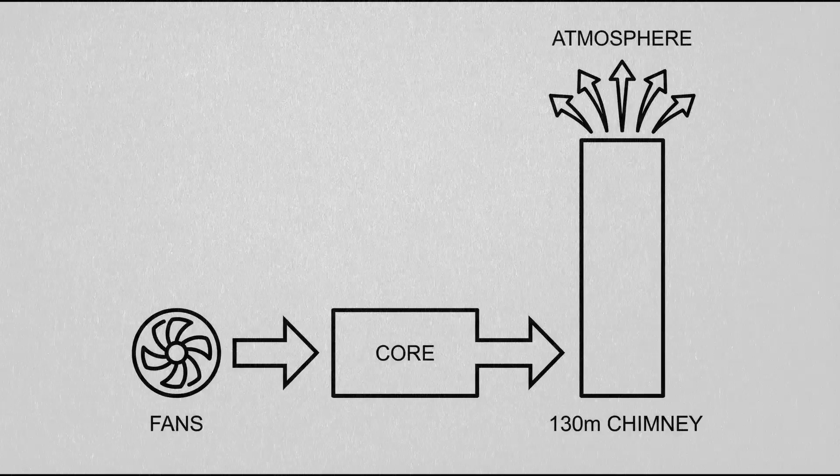No containment vessel and no sealed cooling loop. Just air in and air out. It was cheap, it was simple, and for 7 years it worked. By 1957, the reactor had been running for 40,000 megawatt hours. And the graphite had a problem.

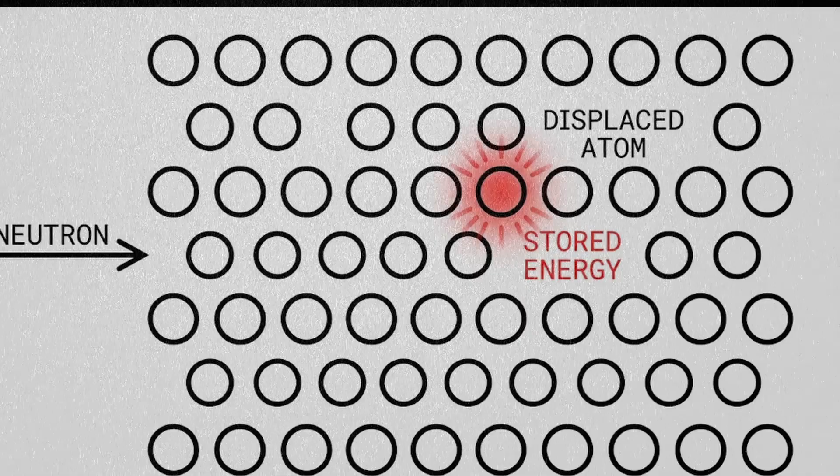When neutrons strike carbon atoms in a graphite lattice, they knock them out of position, creating microscopic defects that store energy. Physicists called this Wigner energy, after the Nobel laureate who predicted it. Left unchecked, it accumulates, up to 2,000 joules per gram. Enough to heat the graphite by several hundred degrees in an instant, without any external source of fire. 2,000 tons of it, all storing that energy.

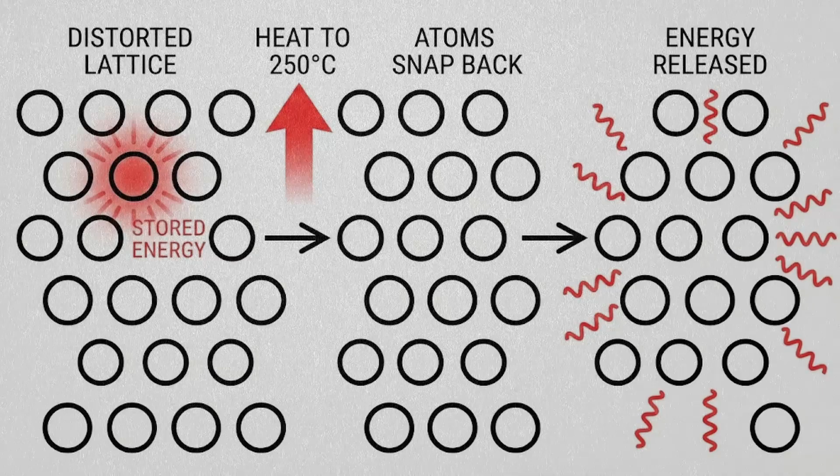The only way to release it safely was to heat the graphite to around 250 degrees Celsius, allowing the displaced atoms to snap back into position. They called this procedure annealing. On October 7, 1957, the operators shut down Windscale Pile Number 1 for its 9th annealing cycle. It would be its last.

The fuel inside Windscale's core was natural uranium metal, 72,000 cartridges of it, threaded through the graphite. And uranium has a property that most people never consider. It burns. Expose metallic uranium to oxygen at temperatures above 250 degrees Celsius, and it oxidizes. Violently, exothermically, and once started, almost impossible to stop.

250 degrees Celsius. That was also the target temperature for the annealing procedure, the very process designed to keep the reactor safe. The temperature needed to release Wigner energy safely? 250 degrees. The temperature at which the fuel catches fire? 250 degrees. The margin between safety and catastrophe was 0. And the uranium was not alone.

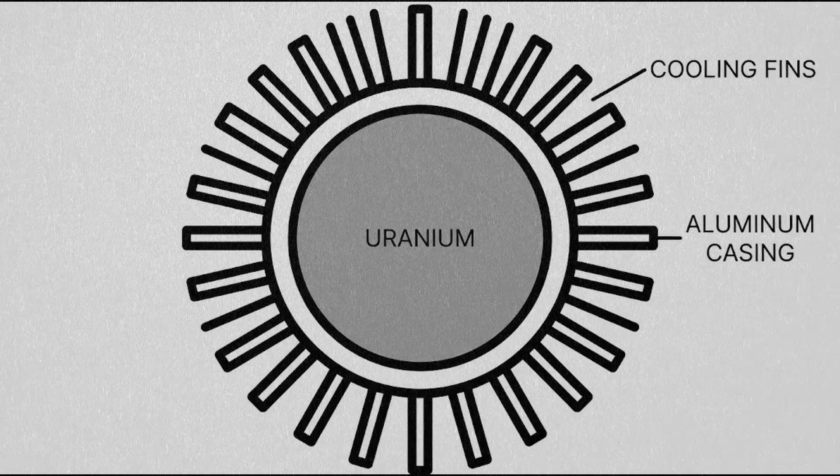Each fuel cartridge was sealed inside an aluminum casing with cooling fins designed to dissipate heat into the passing air. But in 1955, engineers had shaved 1.6 millimeters off each fin tip, a modification to reduce neutron absorption and increase plutonium production. The cooling efficiency dropped. Local hotspots became harder to prevent.

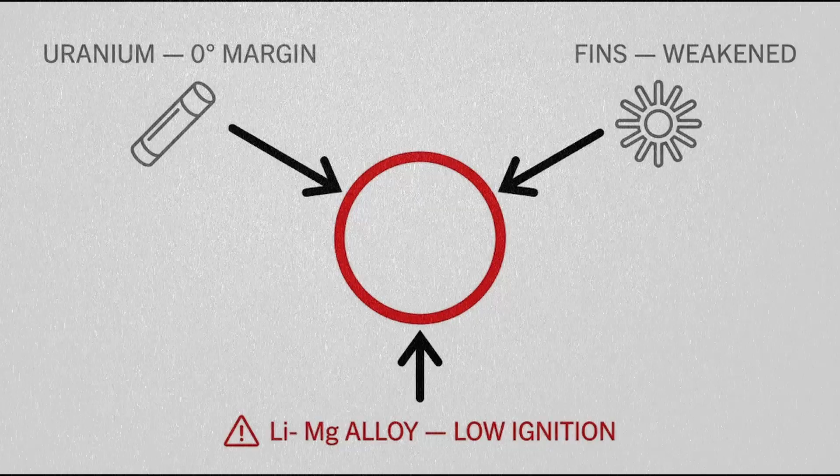And there was one more element in the core that was never part of the original design. Britain's hydrogen bomb program required tritium. To produce it, lithium-magnesium alloy cartridges had been loaded into the reactor, a material that ignites at temperatures lower than uranium. Natural uranium with a 0-degree safety margin. Cooling fins deliberately weakened. A foreign alloy that burns at lower temperatures than the fuel itself. The reactor was not just carrying fuel, it was carrying an accelerant.

So the fuel was waiting. But fuel doesn't ignite itself. For that, you need a trigger, and a system that can't see it coming. The operators had one job during annealing: watch the temperature. But the instruments were watching the wrong place.

The thermocouples, the reactor's only temperature sensors, were positioned at the front face and lower center of the core. These locations reflected where temperatures peaked during normal operation. But annealing was not normal operation. During Wigner energy release, heat builds unevenly, in isolated pockets scattered across thousands of fuel channels. The sensors could not see them.

On October 8th, at 11:25 in the morning, 34 hours after shutdown, one thermocouple showed something unusual. Channel 20/53 was climbing at 10 degrees Celsius per minute. The safe rate was less than 5. But on the control panel, the surrounding channels showed temperatures falling, as expected.

One channel rising at twice the safe rate. Every other reading on the panel declining. The operators concluded that the Wigner release had stalled. At 5 o'clock that evening, they initiated a second nuclear heating. They pushed more energy into a core that was already on fire in a place they couldn't see.

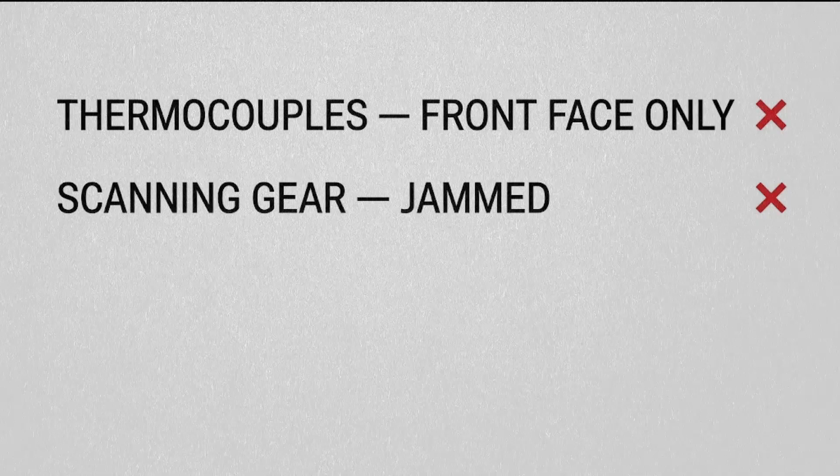And there was no one to stop them. The thermocouples showed a safe picture. The scanning gear, designed to detect fuel damage, had jammed from thermal distortion. The safety review had been conducted by the same organization that operated the reactor. No independent regulator existed. Under the 1954 Atomic Energy Authority Act, the operators, the designers, and the safety inspectors all worked for the same institution.

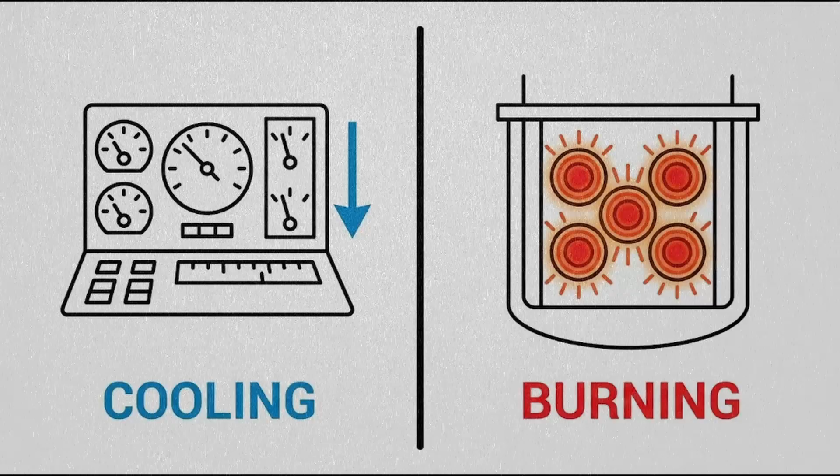Sovereign immunity shielded the facility from local fire codes, public health regulations, and external oversight. The instruments said the reactor was cooling. The reactor was burning. And no one outside the fence knew. By the morning of October 10th, the chimney's radiation monitor spiked, 6 curies above normal. Something inside the reactor was releasing radioactive material into the exhaust.

At 4:30 that afternoon, 87 hours after shutdown, an operator climbed to the charge face and looked directly into a fuel channel. The uranium was glowing cherry red. 150 channels were on fire, with an estimated 11 tons of uranium ablaze. The response was instinctive: open the dampers, increase the airflow, cool it down.

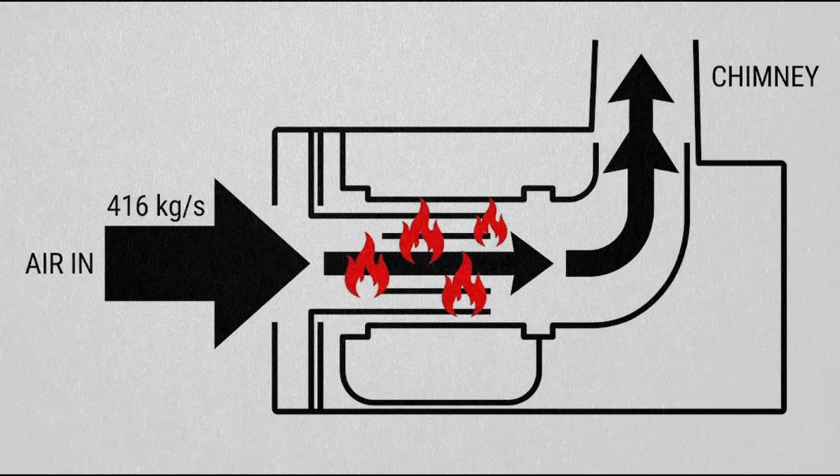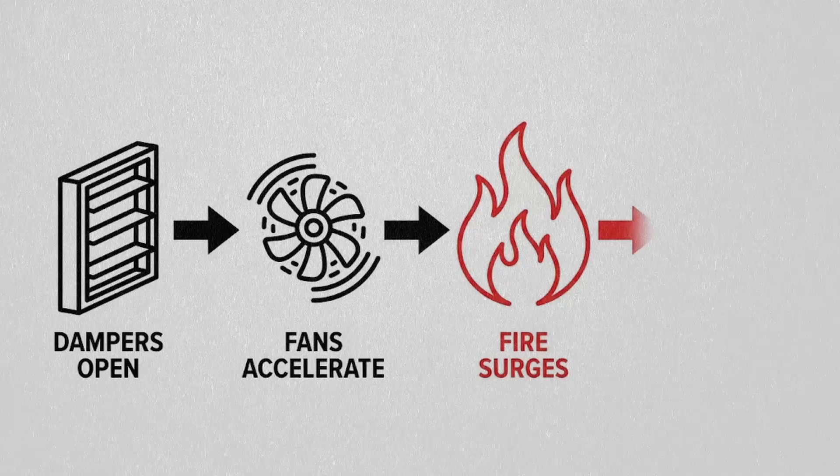416 kilograms of air per second flooded into the burning core. Air contains oxygen, and oxygen feeds combustion. The cooling system had become a bellows. The dampers opened, the fans accelerated, the fire surged. The chimney radiation readings climbed beyond anything the instruments could measure.

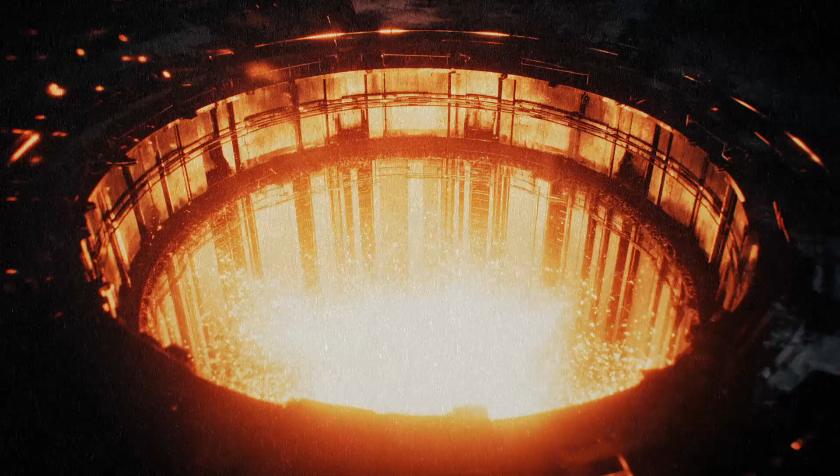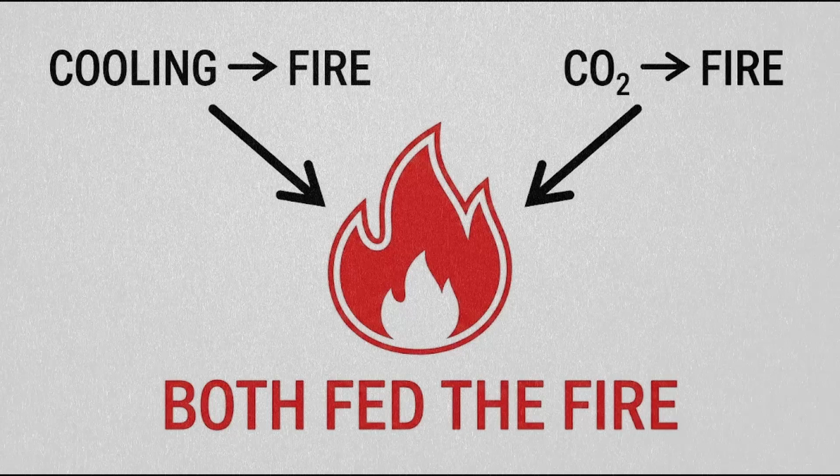They tried carbon dioxide, pumping it into the core to smother the flames. But at 1300 degrees Celsius, CO2 dissociates, splitting into carbon monoxide and free oxygen. The fire extinguisher had become another source of oxygen. The cooling system fed the fire. The fire extinguisher fed the fire. There was only one option left: water.

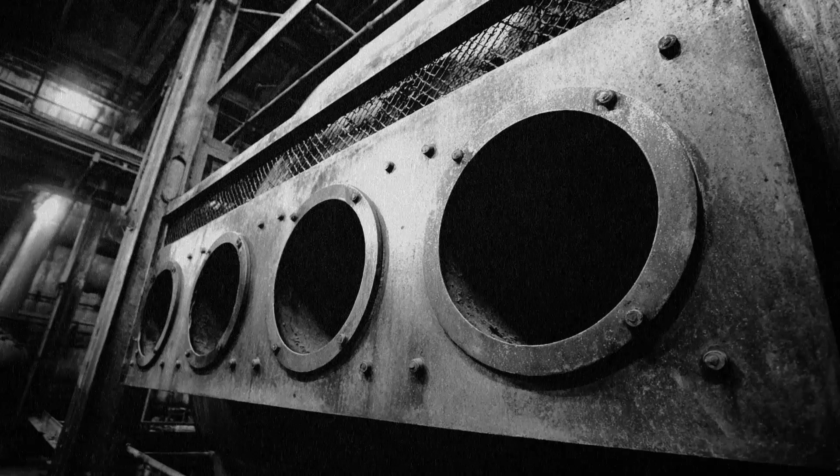But water and uranium at 1300 degrees produce hydrogen gas. And hydrogen, in the presence of oxygen and heat, explodes. To use water, they first had to remove the oxygen entirely. At 10 minutes past 10 on the morning of October 11th, the shutdown fans were sealed. Airflow dropped to 0 kilograms per second.

And then they opened the water. 1,000 gallons per minute, poured onto a reactor core at 1300 degrees with no certainty that it wouldn't detonate. It didn't. The fire began to die. It was 5 o'clock in the evening on October 11, 1957.

Channel 20/53, deep inside the core of Windscale Pile No. 1. The fuel, natural uranium metal with a self-ignition temperature of 250 degrees, cooled by fins that had been deliberately weakened, surrounded by lithium-magnesium alloy that burns at even lower temperatures.

The trap. Thermocouples positioned for normal operation, blind to the hot spots of annealing, feeding operators a picture of safety while the core burned in their blind spot. No independent regulator, no external check.

The path. An open-cycle air-cooled reactor where the cooling system draws oxygen directly across the fuel and exhausts it through a chimney into the open sky. A system that, in a fire, becomes a 416 kilogram per second bellows. In that configuration, the physics had only one outcome. The operators saw a temperature drop on their instruments. They added more heat. The reactor reached 1,300 degrees and the uranium melted.

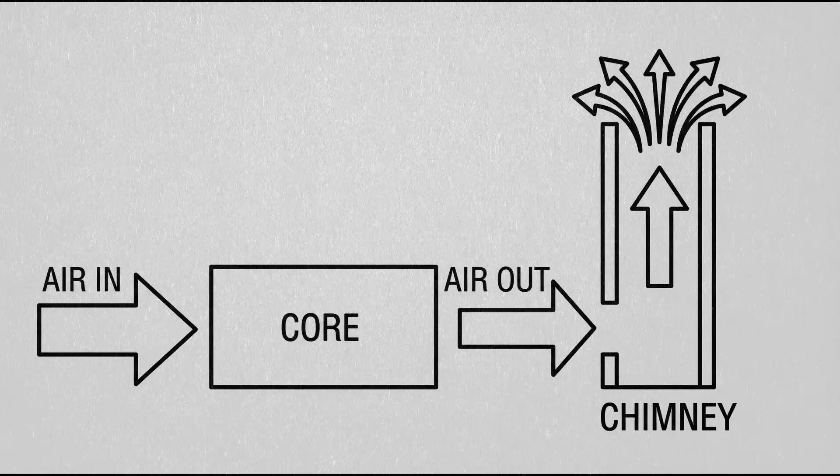The chimney carried 20,000 curies of iodine-131 across 500 square kilometers of English farmland. And the cooling system worked exactly as designed. It moved air. Milk from 500 square kilometers of farmland was seized and destroyed. Iodine-131 concentrations in local dairy reached 29.6 kilobecquerels per liter. The emergency limit, hastily set during the crisis, was 3.7, 8 times over.

There were no immediate deaths, but decades later, epidemiological studies estimated that between 33 and 100 people developed fatal cancers from the fallout. The investigation was led by Sir William Penney. His report identified the instrument placement, the unnecessary second heating, and the organizational failure of self-regulation. Prime Minister Harold Macmillan classified it as top secret for 30 years. The public received a sanitized white paper stating that no harm had come to the population.

The reason for the secrecy was not domestic. Britain was negotiating with the United States Congress to restore nuclear cooperation severed by the McMahon Act a decade earlier. An admission that Britain's reactor had burned out of control would have ended those negotiations. In 1959, Parliament passed the Nuclear Installations Act. Before 1959, the organization that built and operated the reactor also judged its own safety. Sovereign immunity, no external oversight.

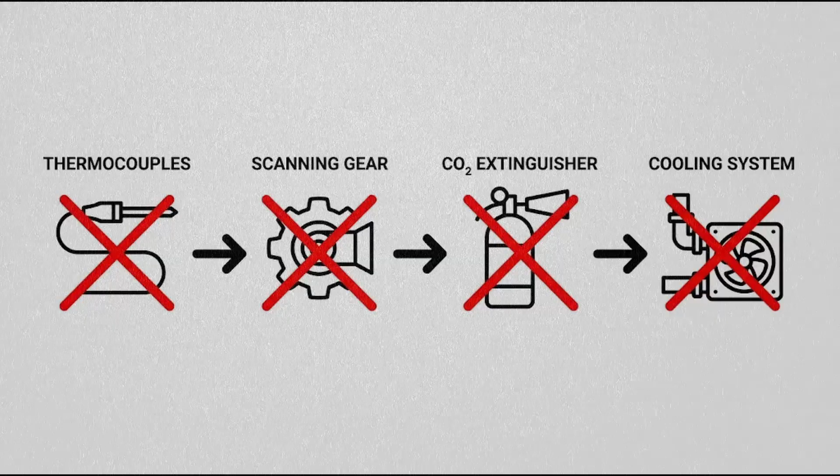The thermocouples failed. The scanning gear jammed. The CO2 extinguisher fed the fire. The cooling system became a bellows. Every safety system that had been engineered into the reactor failed. The one thing that worked was the one thing they laughed at.